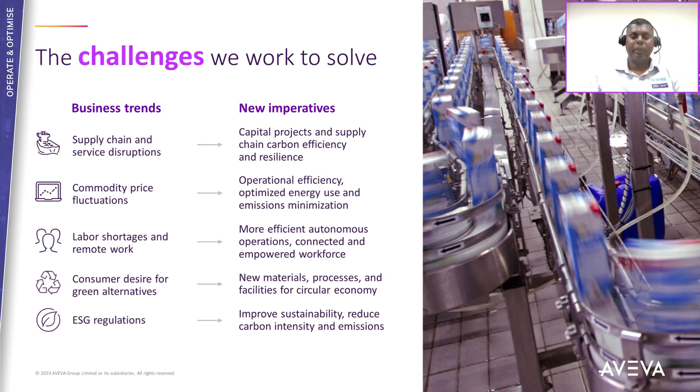Some of the imperatives to counter these are capital projects and supply chain carbon efficiency and resilience, operational efficiency, optimized energy use and emissions minimization, more efficient autonomous operations, connected and empowered workforce, new materials, processes, and facilities for circular economy. And we look at improving sustainability, reducing carbon intensity and emissions.

On this slide, we touch on AVEVA's digital thread for manufacturing value chain, on how to integrate planning, execution, and optimization in manufacturing. AVEVA software solutions provide visibility and traceability, allowing you to view enterprise-level KPIs and scorecards aggregated from multiple plants, selectively share operations data across the enterprise, supply chain, and to customers.

Production and schedule optimization. These optimize the supply chain sales and operations plans for cost, sustainability, and business agility. Manufacturing execution allows you to execute optimized schedules and manage all work processes.

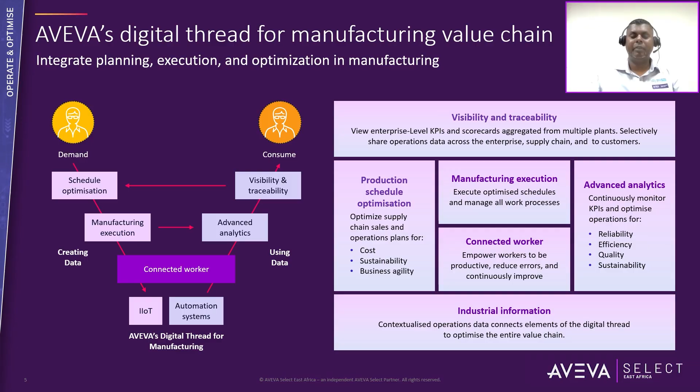Connected worker, we need to empower workers to be more productive, reduce errors, and continuously improve. Advanced analytics continuously monitor KPIs and optimize operations for reliability, efficiency, quality, and sustainability. And lastly, industrial information provides contextualized operations data, connects elements of the digital thread to optimize the entire value chain.

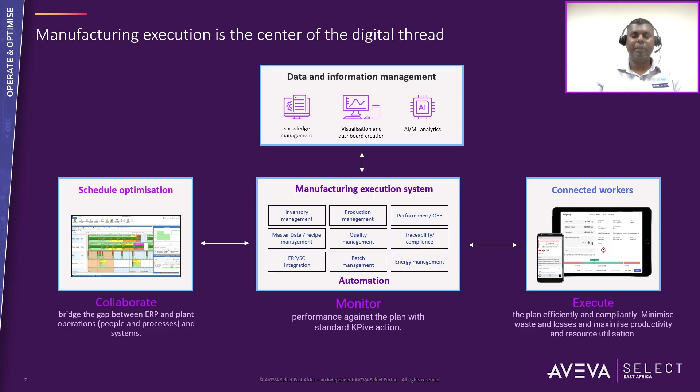This slide highlights that manufacturing execution sits at the center of the digital thread. As you can see from the graphic, we have the collaborate, monitor, and execute, with manufacturing execution sitting right at the center, with data and information management at the top.

What is AVEVA Manufacturing Execution System? AVEVA Manufacturing Execution System offers a complete set of software functions to digitize, standardize, optimize, and govern operational processes and work activities across industrial manufacturing plants.

Its integrated advanced planning and scheduling methods enable flexible scheduling and short-term production management. Businesses use it to safeguard quality and compliance and improve their operational efficiency so that they remain competitive.

Industry-leading agnostic connectivity to automation and industrial Internet of Things devices allows it to meet the real-time production control and regulatory compliance needs of automated production processes and equipment. Automatic electronic record keeping provides detailed product genealogy and end-to-end material traceability.

AVEVA Manufacturing Execution System synchronizes human and machine actions dynamically with sophisticated digital workflow management capabilities, making it the first choice for fast-moving goods and repetitive manufacturing processes.

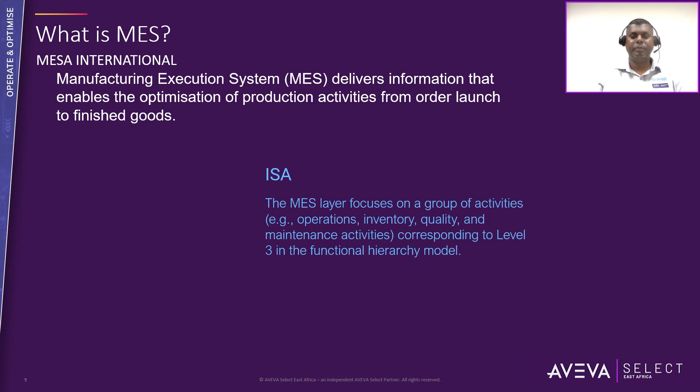On this slide, we look at the MESA MES function model and the components that are included with it.

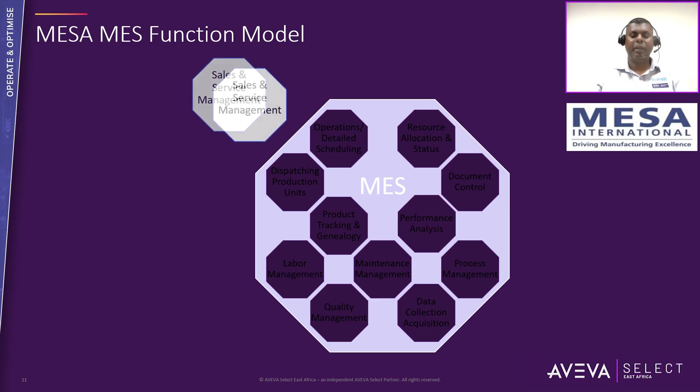Now we will take a look at where these components sit in terms of our AVEVA MES product offerings, in terms of MES operations, MES performance, and MES quality. Here we can see the MES operations software components. Now we can see the MES performance, which is a performance analysis, and our MES quality sits under quality management. Avantis software looks after our maintenance management.

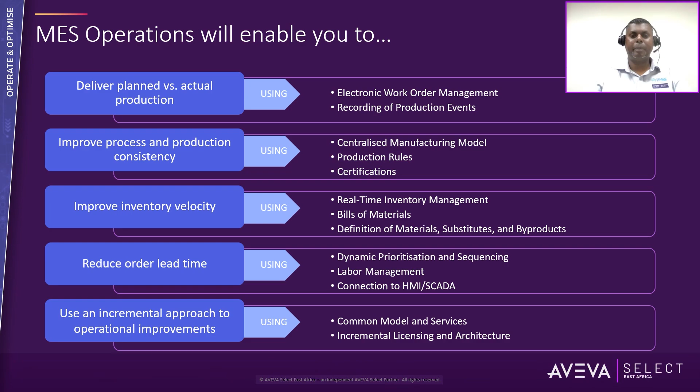The middleware is a group of core services for the MES product that processes data from various parts of the MES product, as requests for information or actions based on shop floor activities. The middleware component also includes the service monitor. This is used to manage the middleware host and the MES service.

Additionally, the MES middleware server can be accessed remotely by configuring the MES middleware proxy on the remote nodes. Lastly, MES service. This handles the middleware activities that occur on a schedule, such as changing shifts, cleaning up stale sessions, and so on. It also includes the service monitor utility.

And we look at the MES client components. MES supervisor is used to coordinate and oversee the daily activities of the system. You can use it to create work orders, inventory levels, and storage location data. You can also use it to set up data collection, link MES to other databases and software, or you can store custom information and process sales orders.

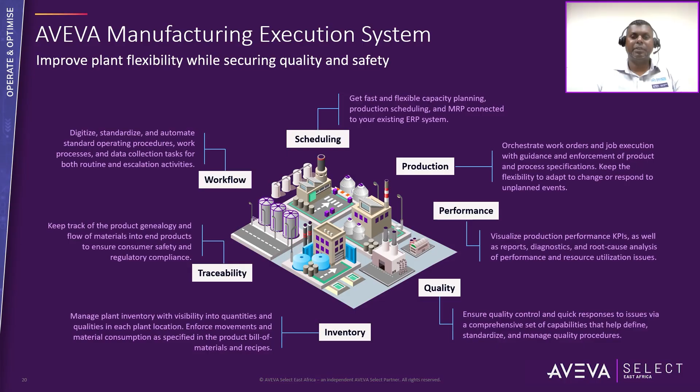On this slide, we look at 3 core benefits of MES for manufacturing operations: increased productivity, quality, and sustainability, and reducing waste and cost through digitalization of work and control production processes, improving decision-making and responsiveness at the plant and supply chain level through real-time visibility and reduced reporting latency.

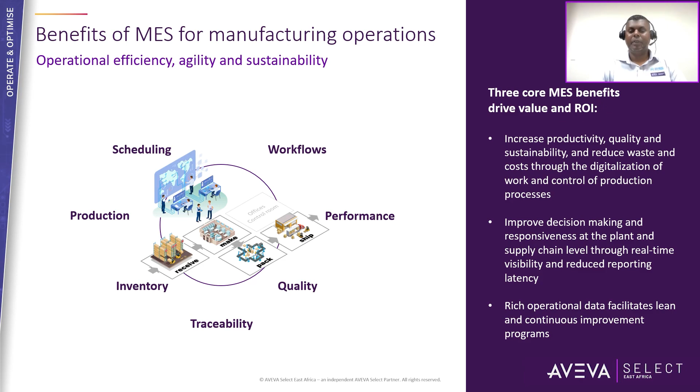Rich operational data facilitates lean and continuous improvement programs.

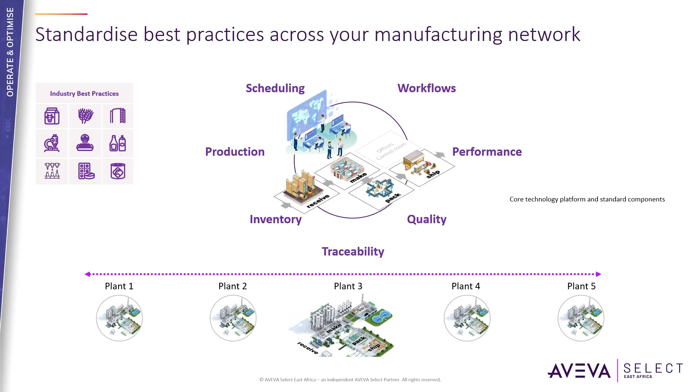On this slide, we look at how you can standardize best practices across your manufacturing network by using templates delivered by AVEVA or our MES practice partners, using AVEVA's model-driven MES approach, and core technology, platform, and standard components included with AVEVA Manufacturing Execution System.

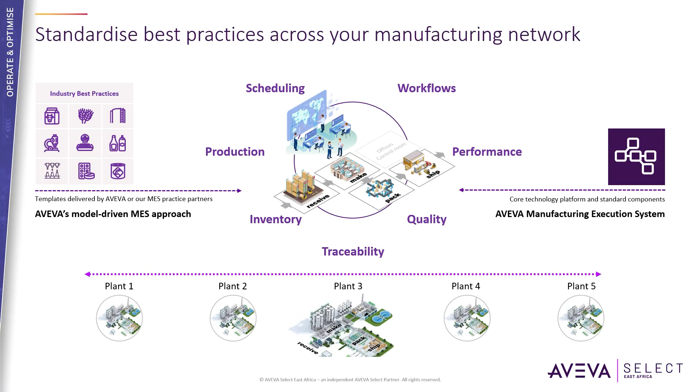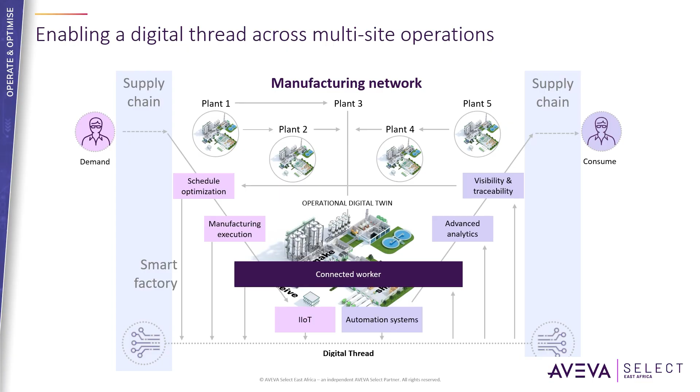AVEVA's manufacturing execution software can enable you to create a digital thread across your multi-site operations, empowering your connected worker.

Workflow management. AVEVA MES eliminates paperwork and mitigates human error. It manages collaboration and human processes with advanced digital workflow capabilities. Graphical workflow modeling describes what sequences of activity workers need to perform to execute simple or complex work tasks, quality inspections, data collection, or sign-off procedures.

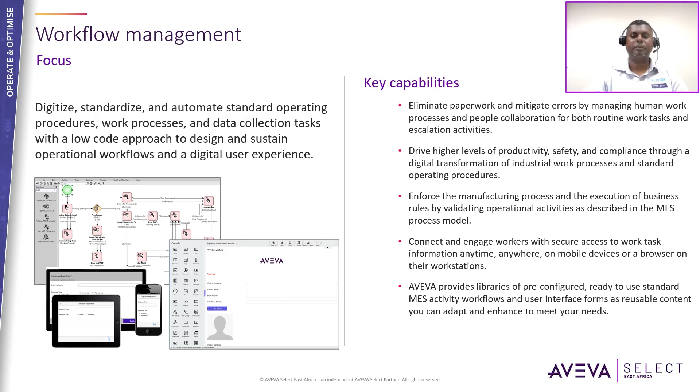Inventory management. Aligning inventory and production activities reduces human error, out-of-spec product and quality losses. AVEVA MES system enforces the specified bill of materials and pre-mix recipes and updates material quantities automatically as they change. It has broad capabilities to manage inventory and storage location. It keeps a track record of inventory operations such as receiving, pre-weigh, and material movements.

Reduce the cost of regulatory compliance and protect brand equity with automatic electronic record keeping. Conduct detailed product genealogy and end-to-end material traceability in minutes. In addition to enforcing manual data collection procedures, AVEVA MES integrates with control systems and devices so it can automatically keep records on production and inventory events, including all material consumption and production, work in progress or semi-finished and finished products. It delivers a detailed product genealogy and quality record, along with material traceability, across storage, mobile storage units, and product locations.

Quality management. AVEVA MES safeguards product quality and safety compliance by automating quality inspection and enforcing data collection procedures. The software applies quality data sampling requirements according to the quality specification defined for producing a product and related process operations, so operators don't have to do this distracting, difficult to manage task.

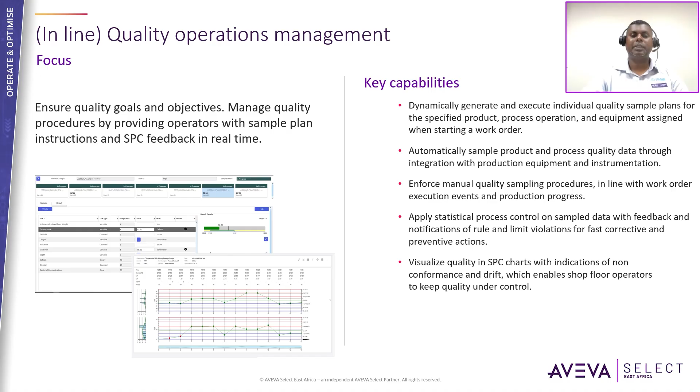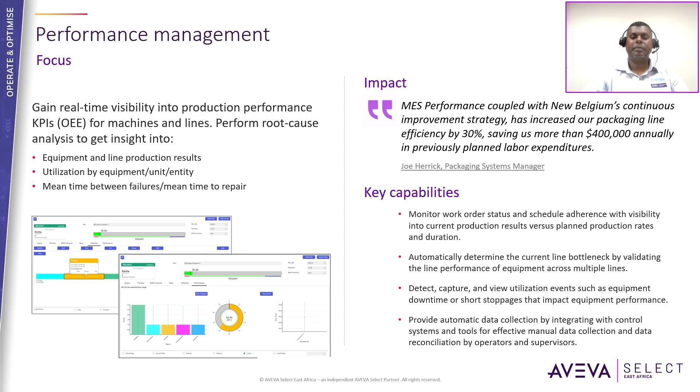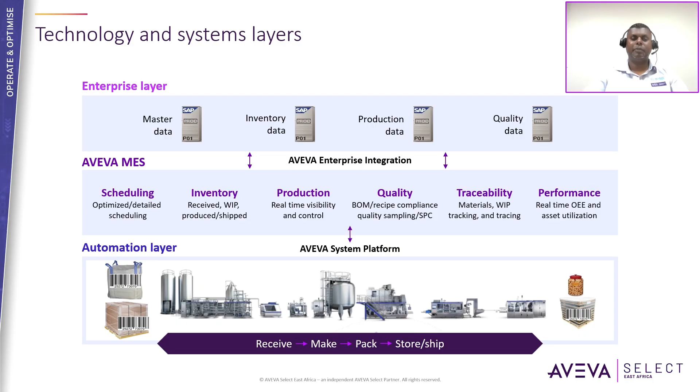On this slide, we look at what is operations modeling. Modeling is to mirror the real world as closely as possible, configure MES operations to support the data structure defined in the physical manufacturing process in order to capture data, obtaining accurate process and instrumentation. So P&ID diagrams, these are helpful for modeling.

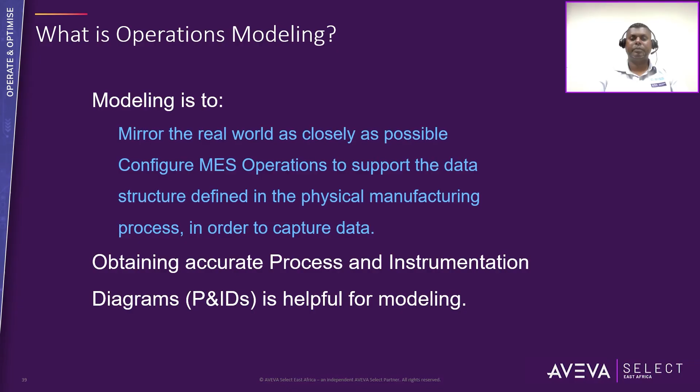Concepts and terminology. Entity. An entity is a physical asset for which information will be tracked or reported. An entity could be an entire plant, a production line, a piece of equipment, or even a module of a machine, also known as an area, equipment, or a machine. An item. Each of the materials consumed or produced by production processes. This is also known as material.

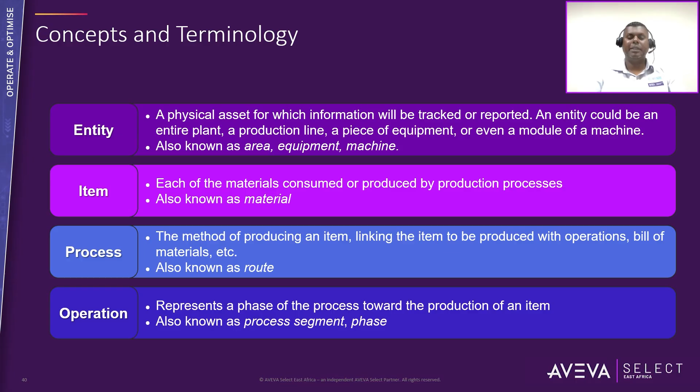Process. The method of producing an item, linking the item to be produced with operations, bill of materials, etc. This is also known as a route. Operation. This represents a phase of the process towards the production of an item, also known as process segment or phase.

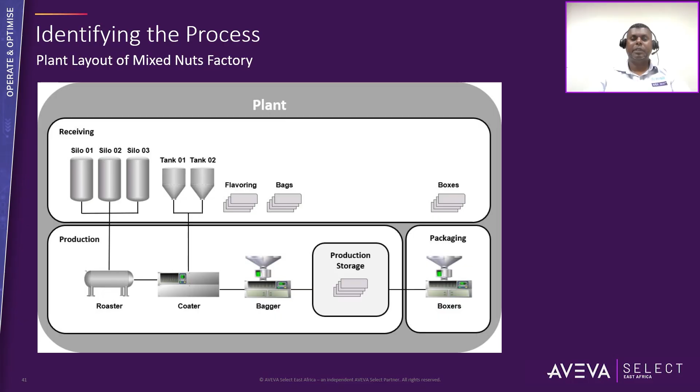So one of the key items when building an entity model or plant model is we need to identify the process. This can be assisted by referring to P&ID diagrams. For this example, we will be working with the plant layout of the mixed nuts factory. The AVEVA MES Entity Model Builder.

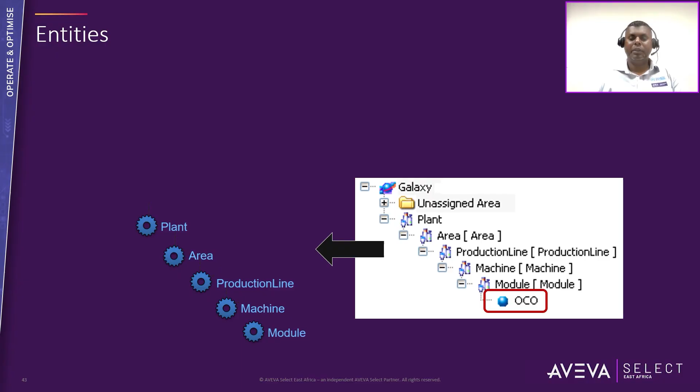On this slide, we can see we've got an area, we've got a production line, a machine, and a module. This can be replicated in our System Platform model view. So here we can see the hierarchy, and on the right-hand side, this is the representation of our model view within our System Platform IDE. We've got our plant, we've got our area that resides under the plant, production line, machine, module, and our operations capability object.

Entity capability configurations in the OCO or operations capability object. Entity capabilities include can run jobs, can store items, can schedule jobs. So these are some of the capabilities that we can enable for an entity. Other configurations include specifications, production events module, attributes, job execution, miscellaneous, and event settings.

Entity operations capabilities. Can schedule jobs specifies whether the entity can schedule jobs. Can run jobs specifies whether the entity can run jobs. Can capture labor specifies whether the entity can capture labor data. Can schedule shifts specifies whether the entity can schedule shifts. Can store, can log data, can ship, can receive, and can copy folders as well. These are some of the capabilities that can be assigned using the operations capability object of entities.

In this demonstration video, we take a look at the operations capability object, also known as the OCO object. The operations capability object is an ArchestrA automation object that allows you to configure entities to perform the following tasks, such as starting, stopping, and running jobs, recording the amount of material that is produced, storing or transferring inventory items, loading, uploading, and downloading job specifications.

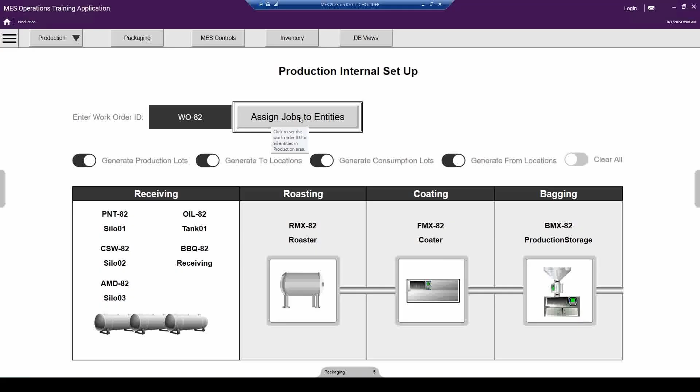What I'm going to do is enter the work order ID, which is 82, and I'm going to assign these jobs to the entities. Now I'm going to click on the roaster. I'm going to verify that it's got the work order of 82, and what I'm going to do is start the job. So I'm going to click Start.

We can verify this by going back to the MES client. You should see on work order 82, the roaster is now running, and this has been initiated from the SCADA. We can see we require 118.75 pounds of nuts. What we're going to do is simulate good production. So I'm going to put in 118.75, and I'm going to add this to the total good production. We should see the total good production updating here.

So I've now simulated that we've had good production, and I'm going to end the job. If we go back to the MES client, we can see that this job is now complete.

Okay, it's the same for the coater as well. I can interact with the coater, so I can just go back to production. I can click on the coater, verify it's got the correct work order, and I can start the job. Okay, if I go back to the MES client, in the work order queue, I can see that the coater is now running. Okay, the required quantity is 125 pounds of coating oil.

What we're going to do is we're going to simulate some bad production. So I'm going to give it a quantity of 100. Okay, so we've only had good production of 100. And then we've had bad production of 25. Okay, and I'm now going to end this job. I'm going to go back to the MES client. Okay, we can see that the coating job is complete.

So from the SCADA side, let's have a look. So we've got work order 83 and the coater job is not run yet. So what we're going to do is from the SCADA, we're going to go to the coater and we're going to start this job. We should get the required quantities from the database. We'll be updating shortly.

Okay, so now let's go to the MES Operator. Okay, so if I do a refresh, you can now see we've got all the information that's been populated because the coater is running a job. And what we can do is we can click on the route. So we can see the route. So it comes from the roasting, goes to the coating and then bagging.

If we look at the work order queue, we can see that work order 83 is running at the bottom here. Okay, so you have got your MES controls at the bottom here. You can either stop this work order, you can pause it, or you can view the BOM details, you can view the job attributes, etc. Okay, you can also view your production.

Okay, you can look at your BOM, so your bill of materials. You can look at your genealogy. If you're running MES performance, you can look at your OEE. Okay, and you can also look at your inventory.

Okay, so this is an example of the MES Operator. So we've also got some .NET controls that you can embed in your SCADA application. If you're running either InTouch or AVEVA OMI, you can embed these .NET controls so you can run the MES Operator from within the SCADA application.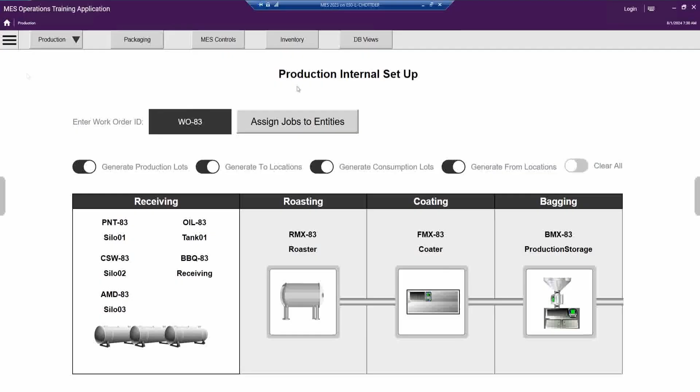Okay, next up, we take a look at tracking genealogy. So using our SCADA system, we're going to navigate to DB views. DB views integrates with the MES database and provides a graphical representation of the data. So we can click on the genealogy data and we can see our various information. So we've got our operation ID, which is the entity, and then we've got the process that was run. So we've got roasted mixed nuts.

We've got our produce units. We've got the lot numbers. We've got the entity name. We've got the reason codes. Okay, we've got good work production. Item grades. We've got the item status, entity name, item class, and we've got some quantities as well.

Okay, so using the DB views on the SCADA, we can actually view the entities as well. So these are our various entities that we have defined. We can look at our work order queue. So if we scroll all the way to the bottom, we'll see the recent work orders that we've run. Okay, we can see the various information for these work orders. We can look at production data. Okay, we scroll all to the bottom. You can see our latest work orders that we created.

We can also look at consumption data. Okay, so we can look at the item description. We can look at the quantities. Okay, we can also look at step data, which we don't have anything at the moment. Specs data, we don't have anything. We can look at inventory lots. Okay, so we can look at our silo levels. Okay, we can look at our tank levels, our receiving, our production. Okay, we can also look at our inventory transfer information.